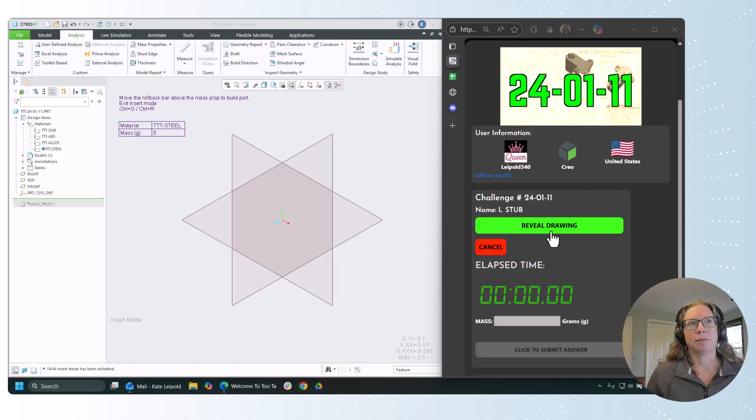This one, really looking forward to showing a little bit of a different way to approach it. You'll see. Here we go.

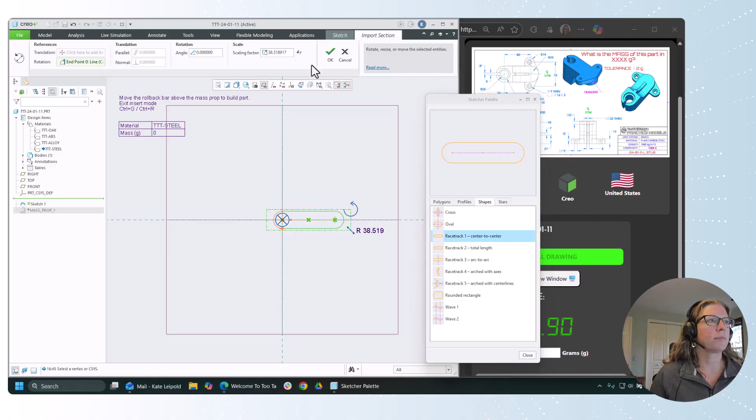So we got an interesting sketch to throw onto the top plane here. And as always, we're going to use that sketch region option to make our life easier. So we're going to use a racetrack shape, drop it in here. And if I right click hold, I can drag my start point so I can put that corner on the origin. And close. So we'll make the center to center distance 80. And the height is shown as the radius at 25, so we'll give this 25 times 2.

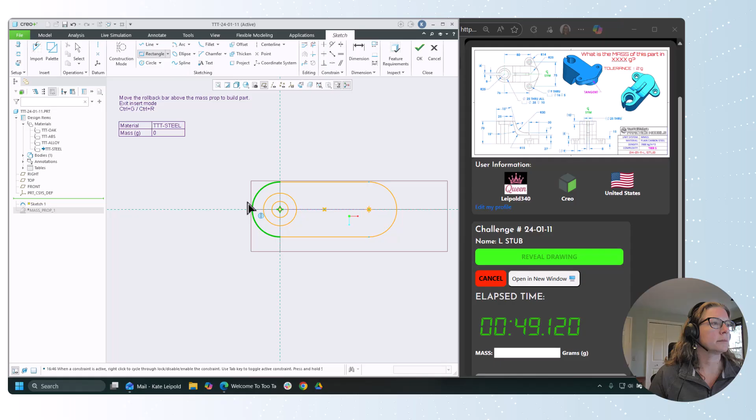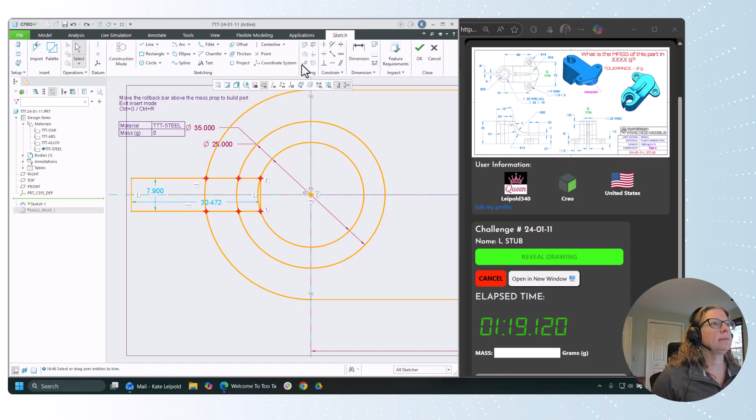What else are we going to throw in here? We're going to get some of these circles on the left-hand side. Add a rectangle. Zoom in a lot here. And I'm actually going to trim, let's see here. This number I'm going to make 25, and this one I'm going to make 35. And then I'll trim, it should keep those diameters. Oops, let's try that trim again. There we go. And now I can dimension that width of 8. Hey, that was pretty close.

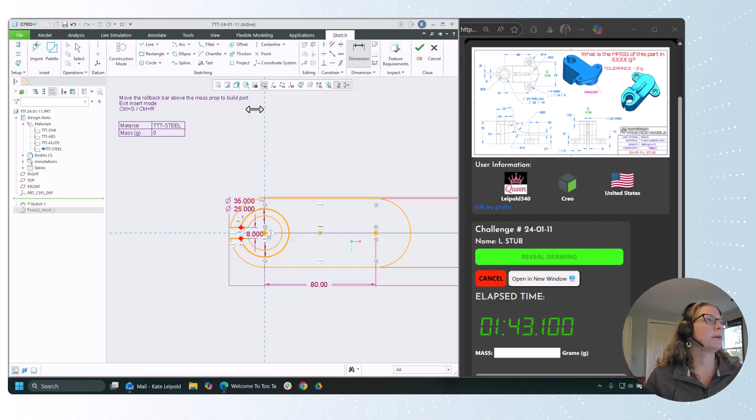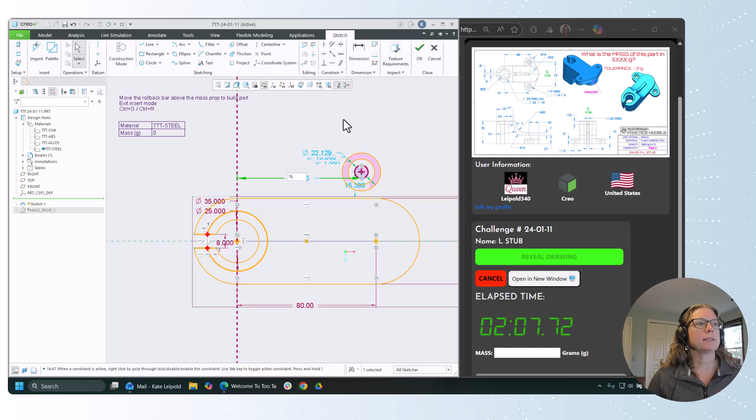All right, on the other side, we're going to go ahead and add this kind of hammerhead shape. I'm going to draw part of it. I don't want that equal sign, so quick right click locks it in, another right click turns it off, so that can be helpful sometimes. We're going to make that 76, easy one to miss. All right, and then we'll add a line that goes from here down, and we'll add a tangent line from here to that one. Let's see how we're doing.

This one should be 75, the overall, or the center to center counterbore hole location. Half that, we'll divide by 2. Let's see here, which is that one? All right, let's make that our radius, so we'll make that 14. That's the outside one. And then, the smaller hole on that counterbore is the 9, and the larger hole on the counterbore there is 16.

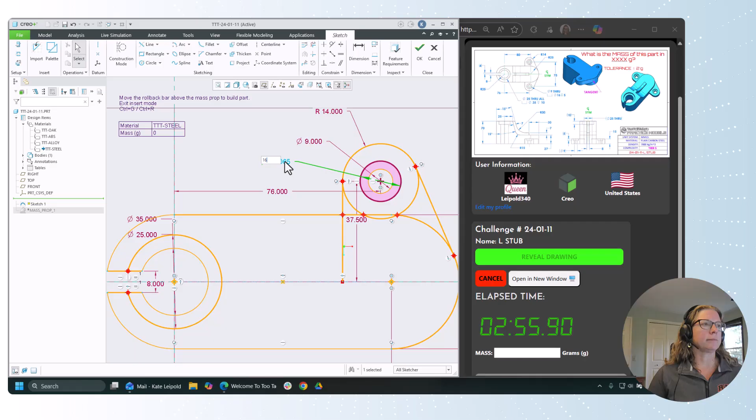Okay, and let's use the inclusive selection of left to right and mirror over the center. And we'll use this sketch to make both of those geometries. Now I'm going to do one other thing.

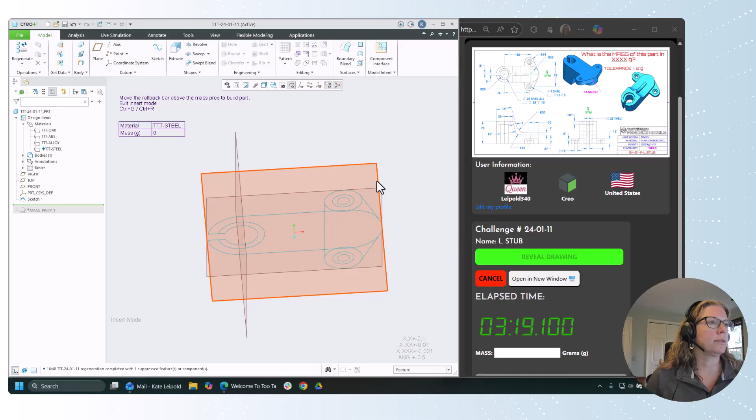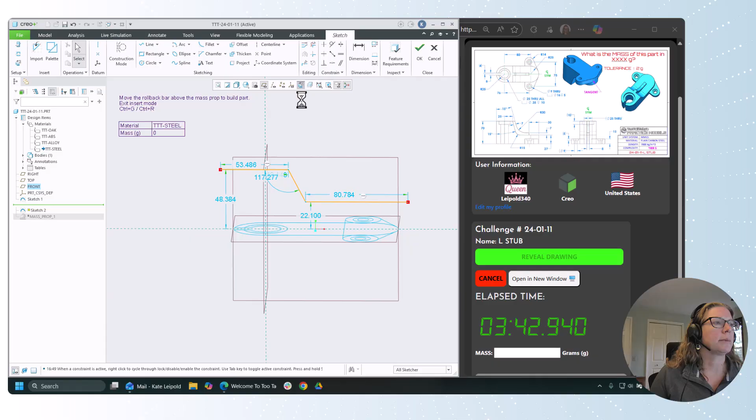I'm going to create a sketch on the front. And it's going to get kind of this shape, and I'm going to extrude up to a surface. So that's kind of exciting. I want to make sure I go further than the part, something like that. And go back to 2D. Let's make sure I got a fillet on that corner.

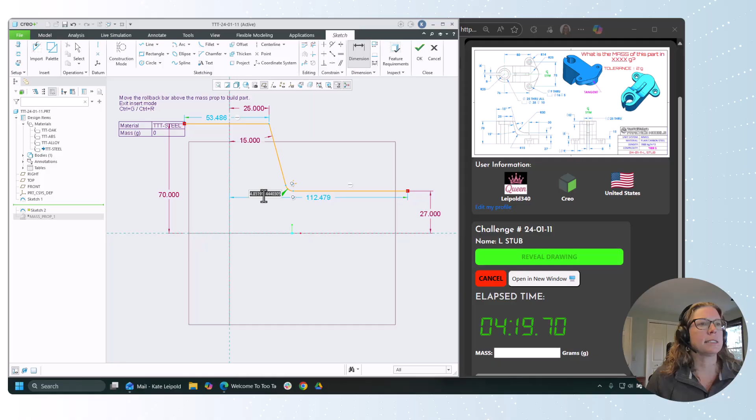All right, let's throw some dimensions on here. So that has a height of 27. And we got an angle in here of 15. Got an overall height here of 70. And from the center of the counterbore hole to the top of the slope is 25. Oh, and our radius is 15. Those other dimensions, as long as they're longer than the part, should be okay.

Okay, and we're going to take that sketch and we'll extrude it symmetric. Again, as long as it's wider than the part. You know what? We see the sketch, let's just go past it. That surface should work. Okay.

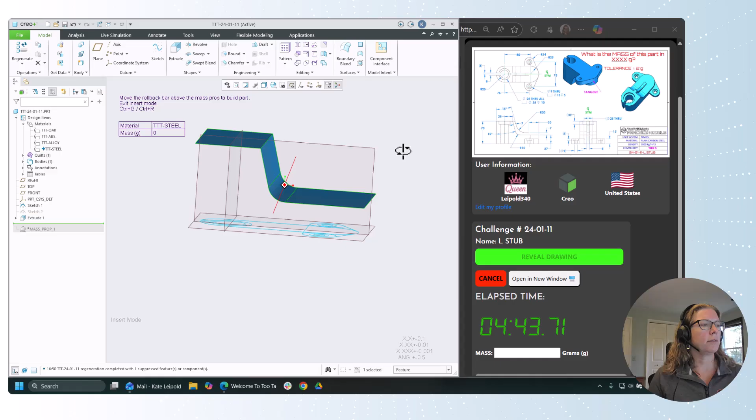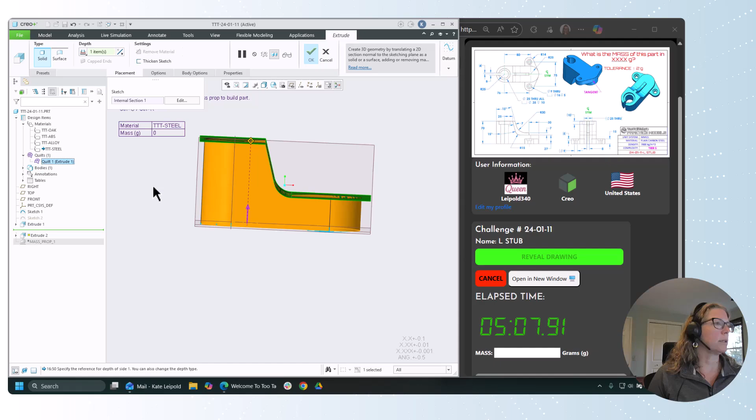All right, so let's use our sketch region, and let's do, let's see if that works. Let's give it an extrude up to reference, and the reference is going to be that quilt. And now I can hide the quilt. So I like that. You could also do it as an extrude cut, but just another option available for you.

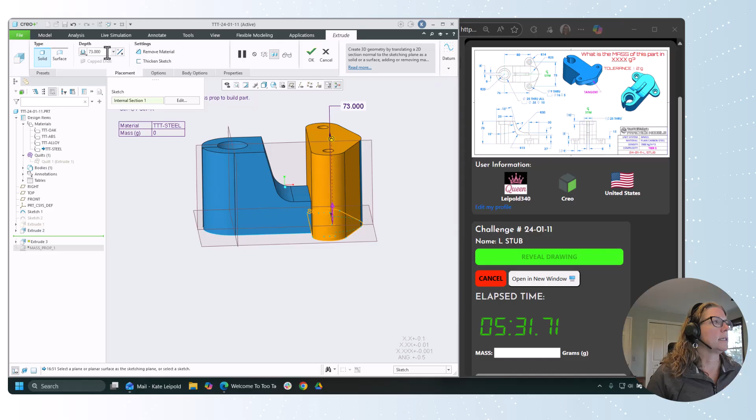All right, we're going to select that whole section, but we'll hold down Control and get rid of the center points. We'll extrude that up for a height of 15. Actually, I probably should have left out the counterbore hole area, but I can still take advantage of that sketch, so we can do that next.

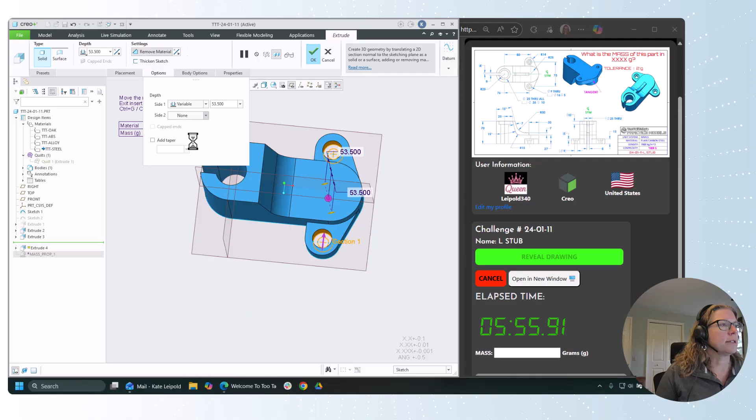We'll get this one and this one, and we'll extrude those. This is a little tricky. Yep, it's been switched to remove material. That's fine, but I don't want the other side. I'm going to kind of drag it in. Let's see, drag this up in here. So the height of the bottom section is 15, but the counterbore is 5, so this will be 15 minus 5, or filling in 10 below. Okay, technically, let's make this go to next.

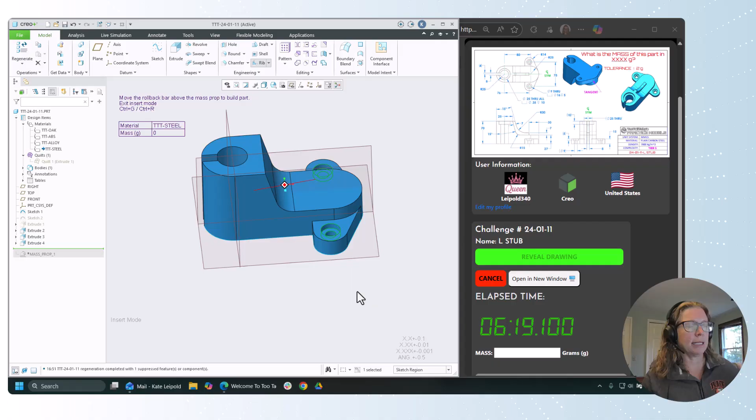All right, so it looks like the last thing to do here is to add the rib in the center. I think we can just sketch that right on the extrude. Or sorry, extrude that right on the front plane. Let's project.

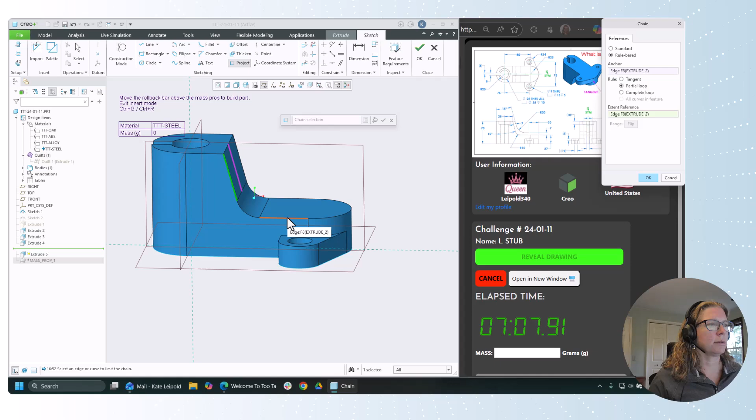All right, so we're going to go. Yeah, this is showing up on the wrong screen. Let's drag this over here. We're going to select this edge, but it's going to be rule-based and partial loop and come down through here. Beautiful. Okay, go back to 2D, and let's kind of build this out.

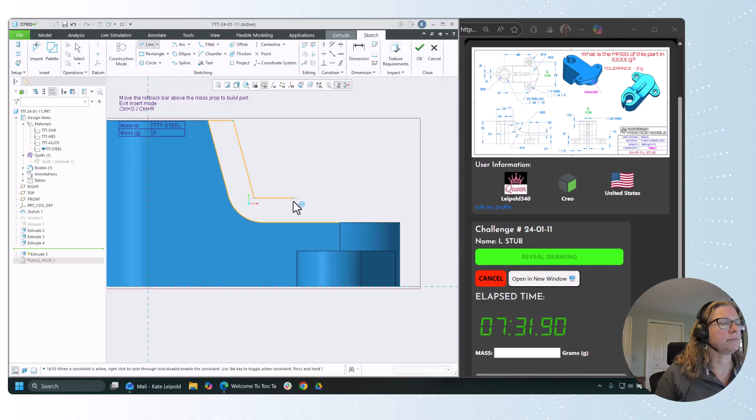That was weird. Again, I don't want it to be concentric, so double click. I do want it to be parallel. That's good. Let's drop it straight down. No? Middle click. Make that vertical. Let's add a little round in there. Make that one. All right, make that 7, make this one 30. Nice big round on that one.

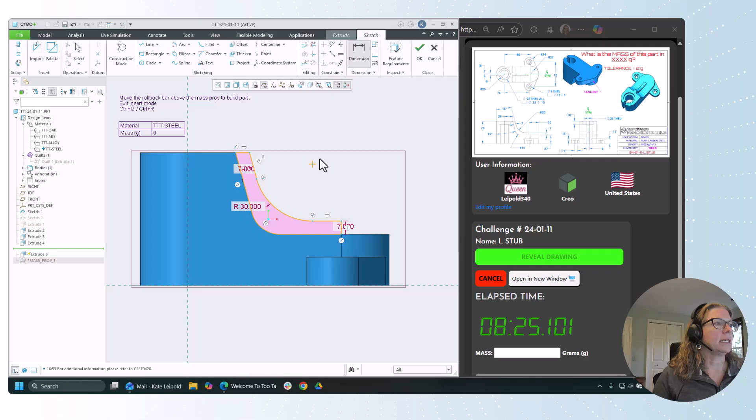And let's add the dimension for the distance between these two parallel edges. Let's try that again. I feel like something weird is going on here. Oh, it's getting the composite curve, I just want that line. There we go. All right, should be good. Let's hit check mark, do a symmetric with a rib of 8. Give it a little spin.

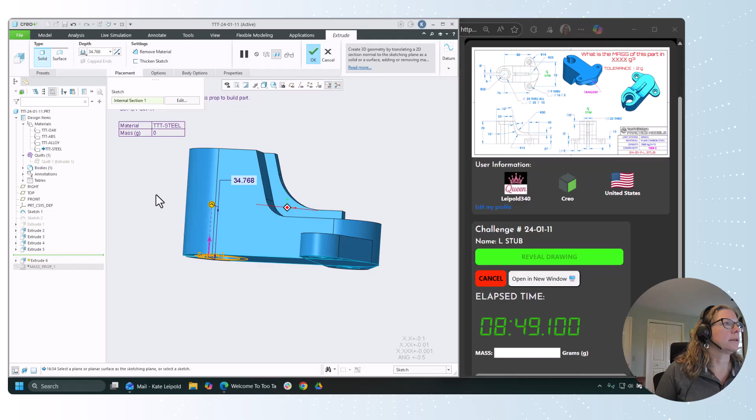Oh, I'm missing a counterbore again. So let's sketch region, extrude this shape the other direction. That height is going to be not removing material, there we go. 70 minus 10.

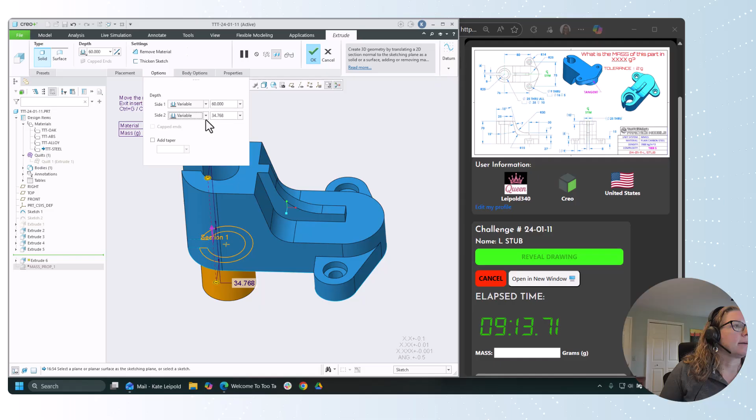Don't want to remove material. So the issue is the same as last time. So my second option, let's see. All right, so the top one's going to go through all. The bottom one's going to be 60. And...

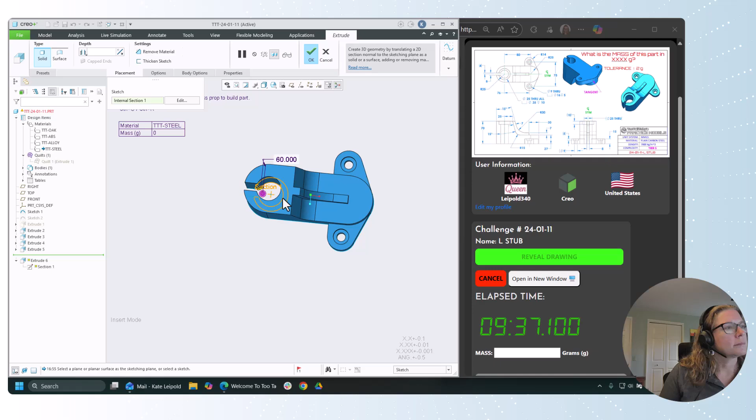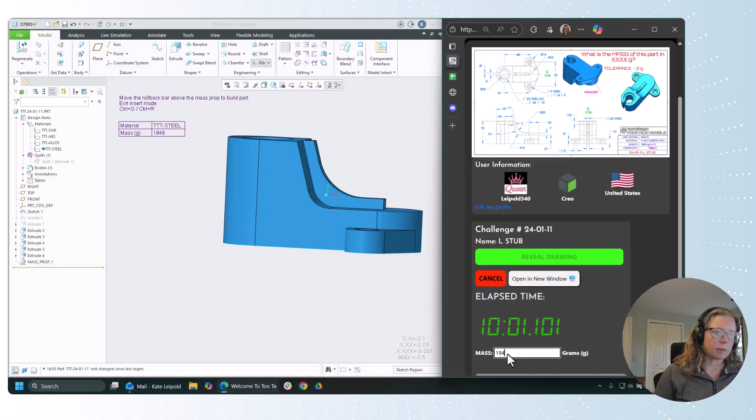Think I am removing material. All right. Not sure that that's quite right. Let's give it a try. Hey, we got it. All right.

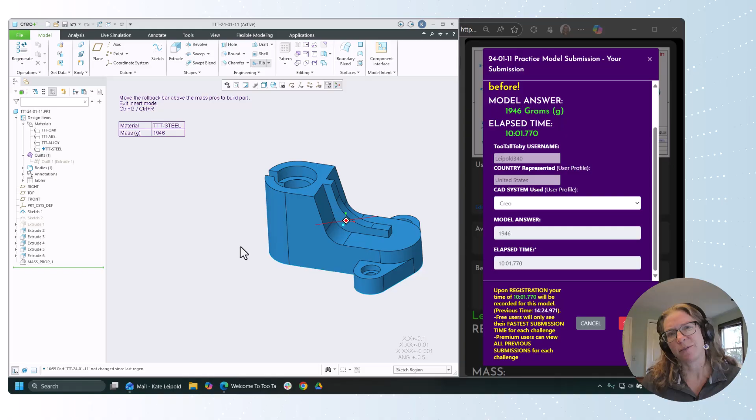So let's see here, what was new there? We had to do some counterbores from the bottom up. We did a pretty complicated sketch region there. We used a surface, extruded a surface as what we are going to extrude up to instead of making a cut. Used line tangent, but yeah, there we go. 240111 done.